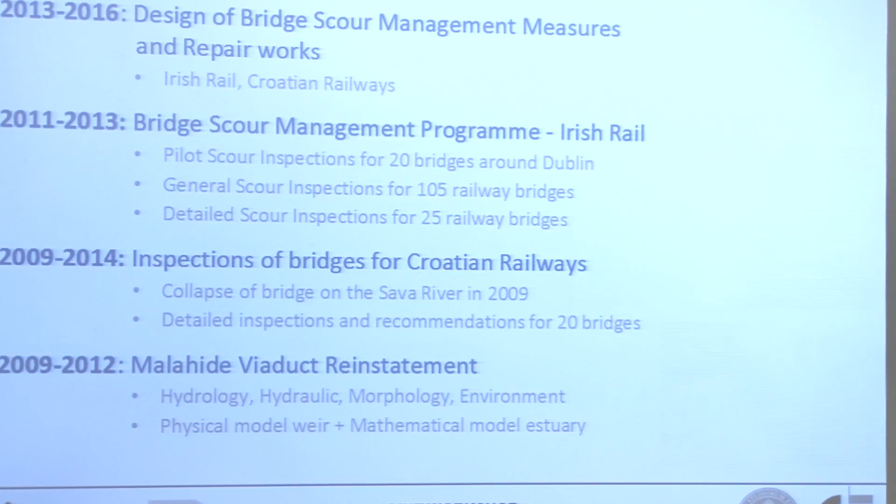I would start a little bit with the background on how the project idea evolved.

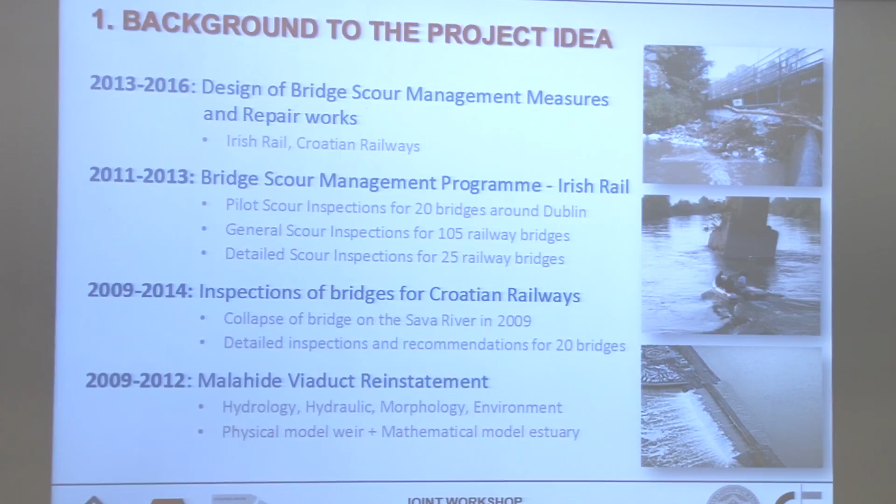We, as partners, were actively involved in the rehabilitation of Malahide Viaduct, which collapsed in 2009. We did the analysis of past events, and we were also involved in the investigation and design of that weir. We were also involved in the assessment of the causes of the failure of the Sava Bridge, which I was not able to join you on yesterday, but we were actively involved in that project as well.

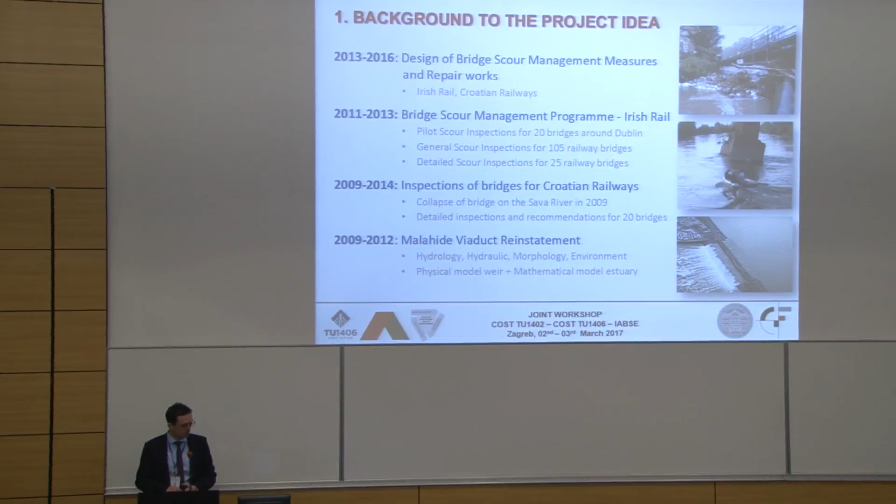Further to that, we were involved in the assessment of scour risk across Ireland for more than 100 bridges, and also in design studies of scour protection in Croatia and Ireland, etc.

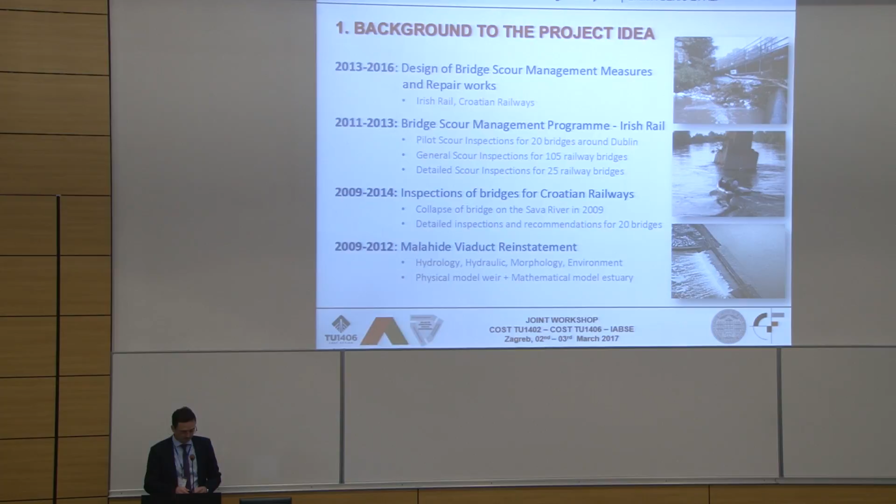This is what my previous presenter also pointed out, that scour is a main cause of failure of bridges. From this well-known study in 2007, if we look at the number of bridges and causes of bridge failure, we can see that 58% of the failure is due to hydraulic effects, which is actually scour.

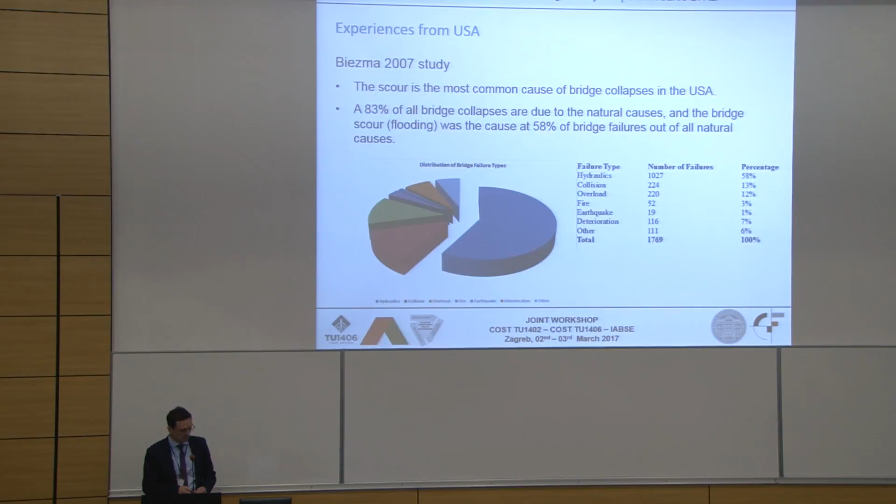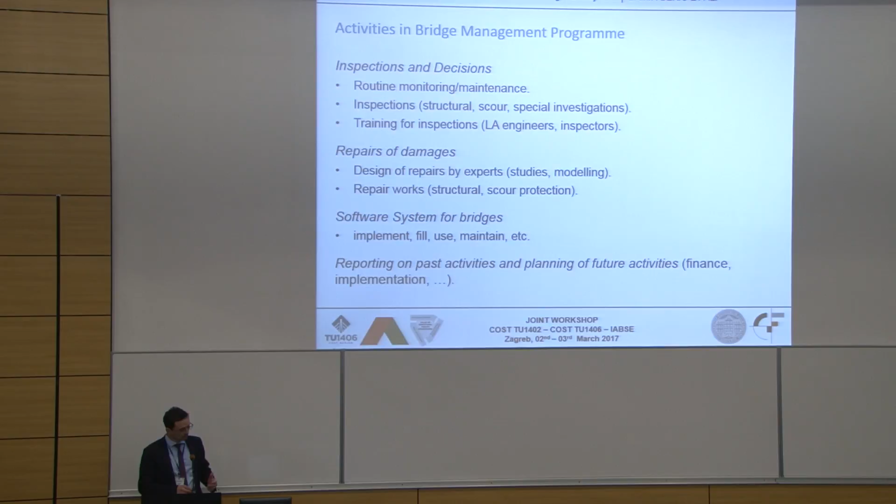There's also reporting of past activities and assessment, and looking at future activities. So from the end user point of view, there are always limited budgets and limited time available to collect and process all this data.

So decisions must be made in terms of how and where those limited resources should be invested, and where the investment is not justified on the other hand.

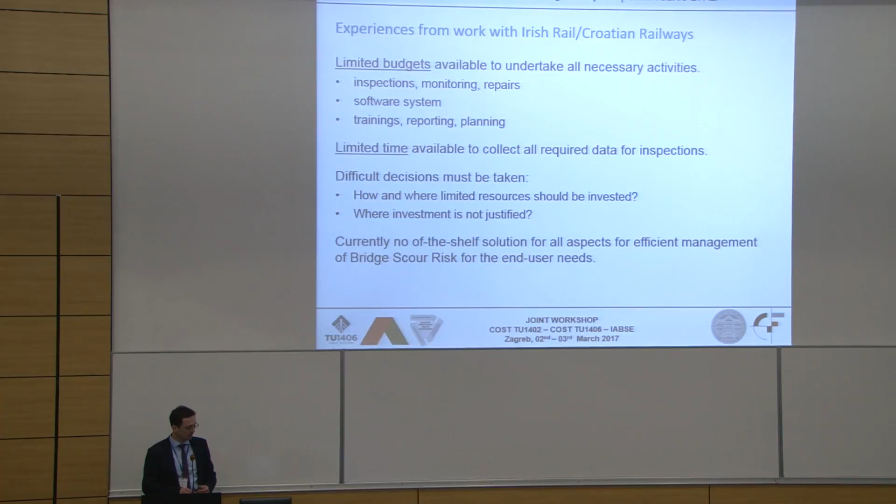So when we looked at this, we actually looked at the various possibilities out there on the market, but we said, okay, we need to look at this from scratch, from the beginning. This is how the idea ended up with having a cost-effective solution mainly for scour risk, which is what I will point out today, but we broadened it up also to the structural aspect of bridge safety.

So in general, BRIDGE SMS project is an IAPP project under the FP7 IAPP program. Its duration is 4 years, from 2015 to 2018.

The budget is 1.4 million euros. The partners are two research institutions, University College Cork and the Faculty of Civil Engineering from Zagreb, two industry partners, Cork County Council from Ireland and Infrastructure Portugal, and a software company from Zagreb, Atlas.

We also have a supporting institution, University of Lincoln, and two institutions from Ireland.

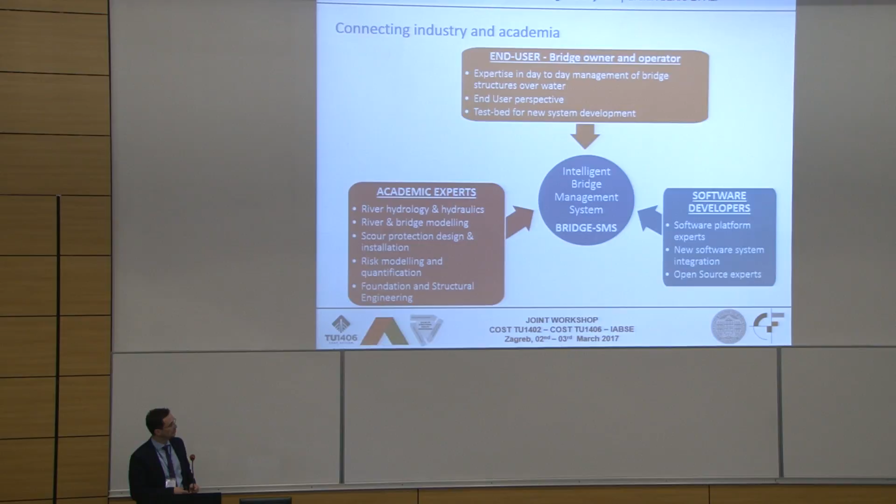So when we look at the scheme of how this interconnects, from the entire project we have the end user perspective. We get information from their needs, what their daily work actually is, and how they look at this inspection system, because they're not dealing only with bridges, they deal with roads and other aspects of infrastructure assets. Then we have academic expertise from universities, and software developers who help develop the entire system. All of this is jointly interconnected within the entire project.

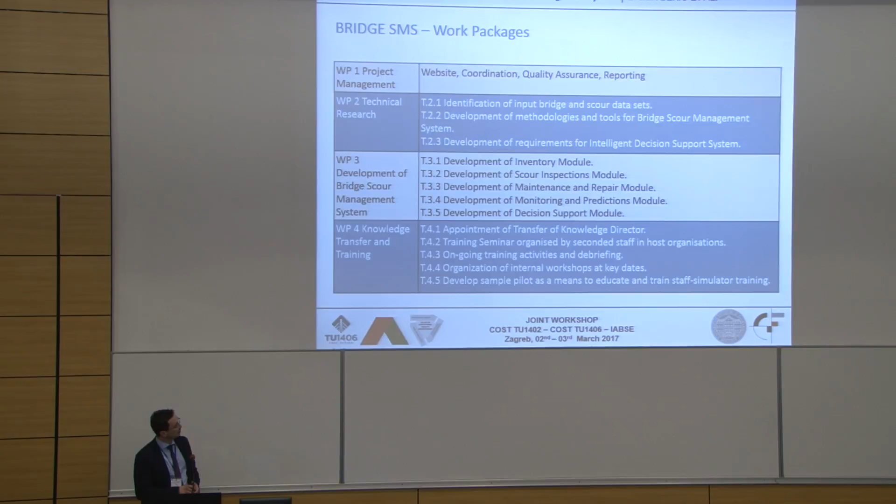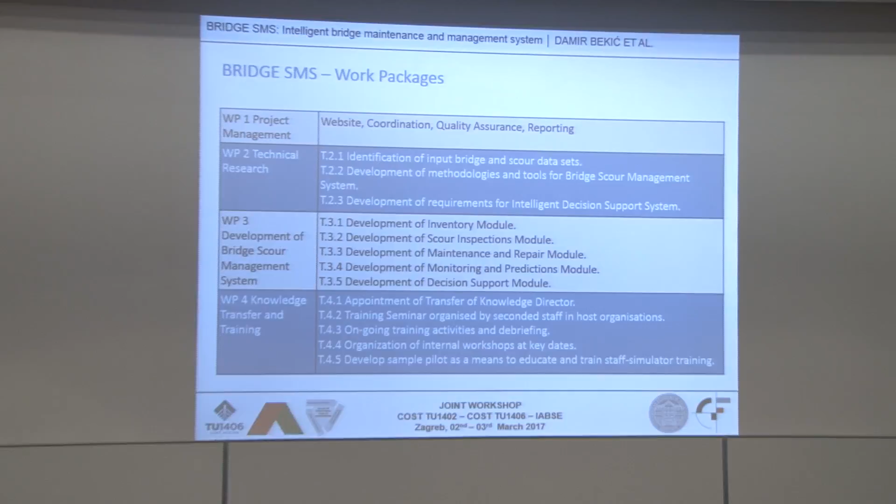If we just quickly look at the work packages, the first is more general project management. What I would like to point out today are a few elements of the technical research, which actually goes into the identification of input bridge and scour data sets.

The data is the most valuable thing we've seen, and how we process, collect, store, and use the data is, I would say, one of the big elements of our idea and of this project.

If we look at work package 3, it's the development of different modules, so we are looking to develop it as a modular system. In the end, there is knowledge transfer and training involved in this project, as this is part of the Marie Curie Action.

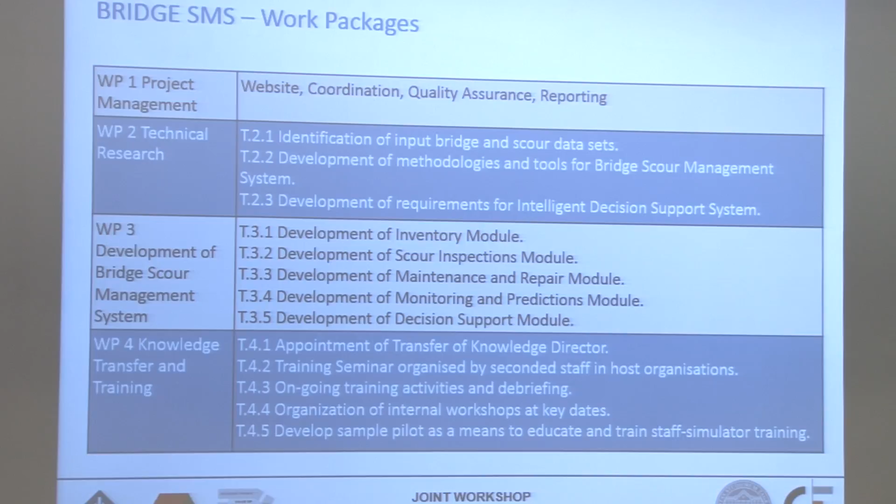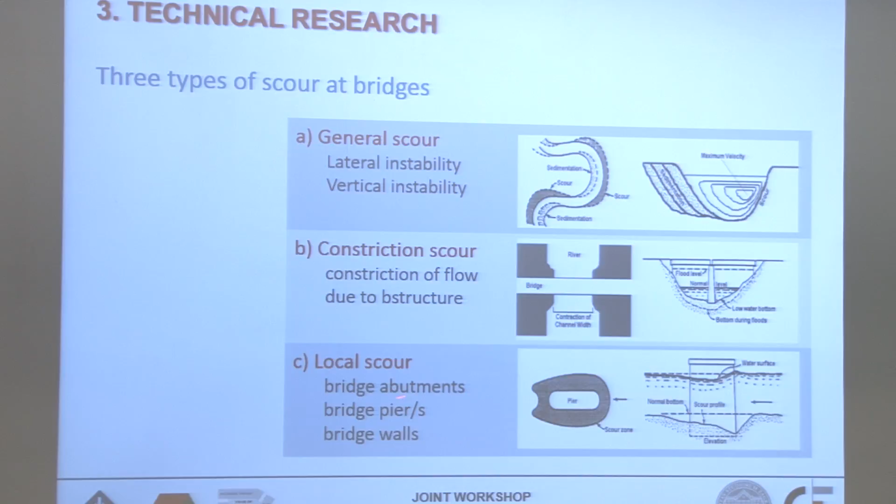When looking at the general aspect of scour, there are actually 3 aspects which need to be addressed. The first is general scour, a morphological development of the river where there is no structure at all, so the river develops either horizontally or vertically. Then we have a constriction scour aspect where there is a bridge included, which constricts the flow, increases velocities and produces problems to the bridge. And there is local scour due to abutments or piers, which deflects the flow and increases the potential of scour.

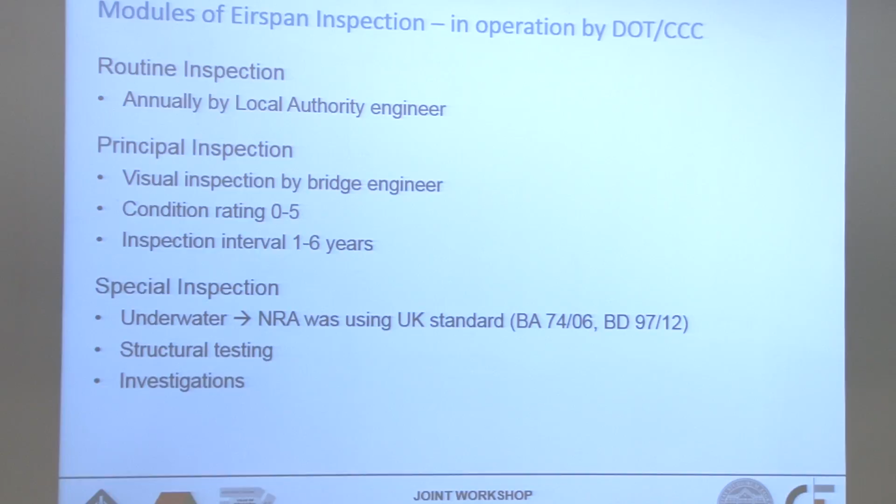Now looking at the end user, which is our county council in Ireland, they are using the Eirspan system, which is basically from Denmark. We have a routine inspection, done annually. Then there's a principal inspection, done either once a year or every 6 years. It gives a condition rating, usually by visual inspection of a bridge engineer. This principal inspection actually has only one component for scour, which is the condition of the riverbed.

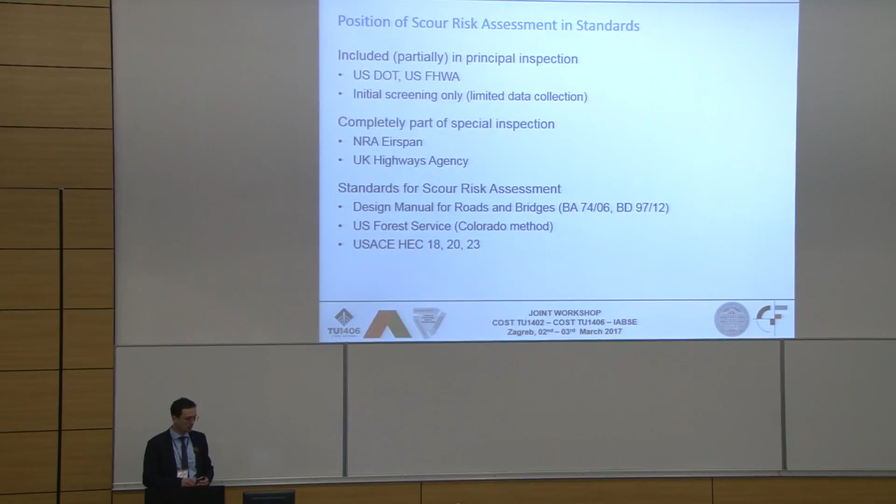So if we look at general scour, constriction and local scour, there is only one component that looks at all these 3 aspects. Where is this scour risk addressed? The National Road Authority in Ireland uses UK standards, BA 74/06 or now BD standard, to assess scour risk. So in the principal inspection, only one component looks at scour risk in this existing system. When we looked at other systems, for instance from the US Department of Transport, scour risk is included in the principal inspection, but only partially, not fully covering general, constriction and local scour. Sometimes the NRA system uses a completely special inspection to investigate scour risk.

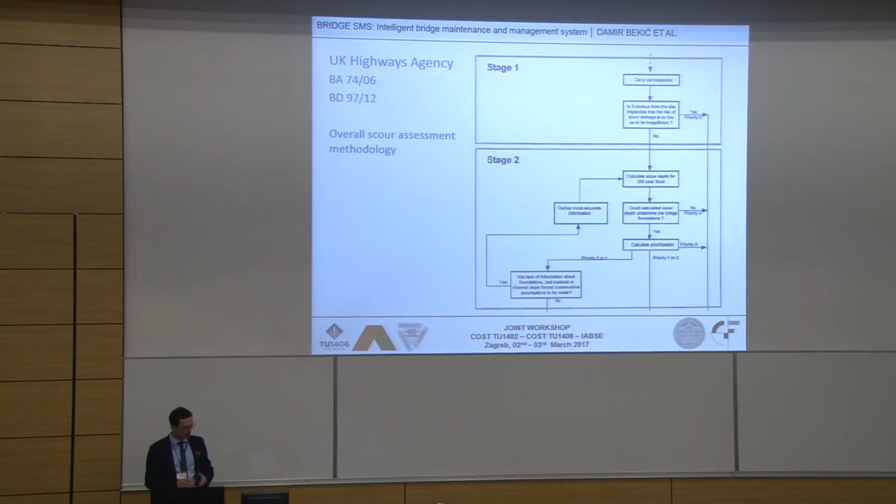So to assess scour risk, there are different standards to include in the entire bridge management system, either the UK or US standards, and I would like to show you some results of using those. My presentation is mainly focused here on scour risk, not the whole aspect, because there is limited time to present everything.

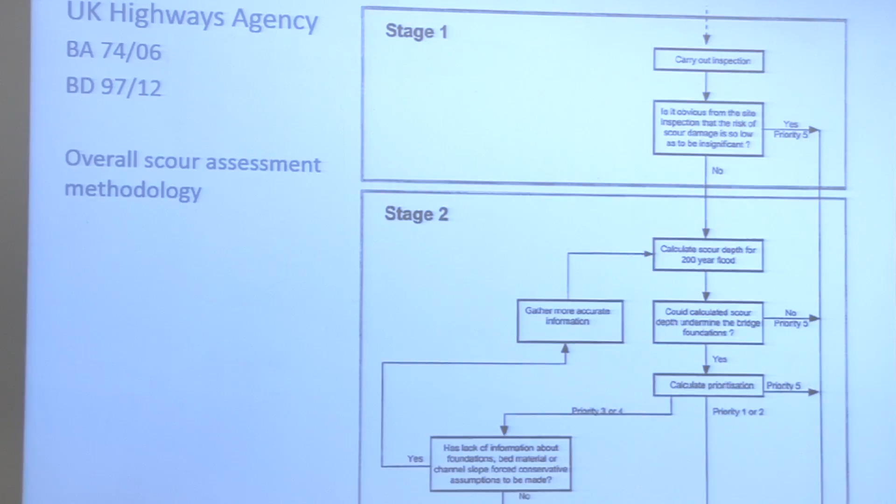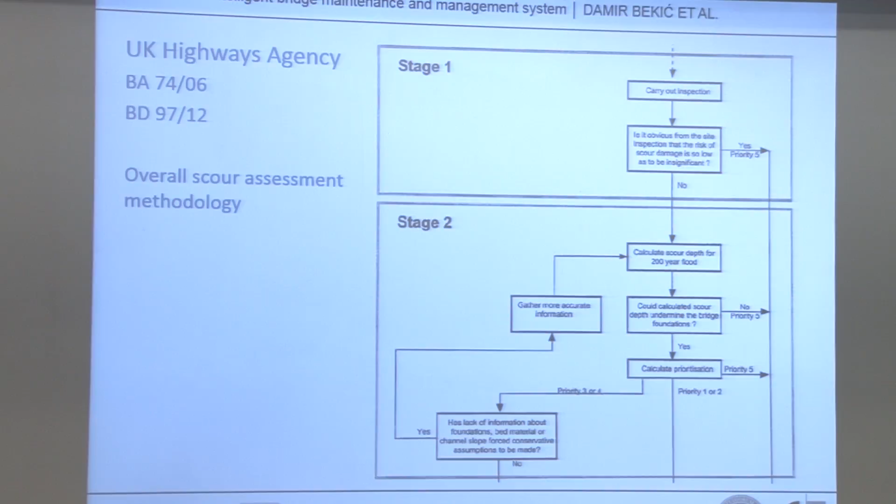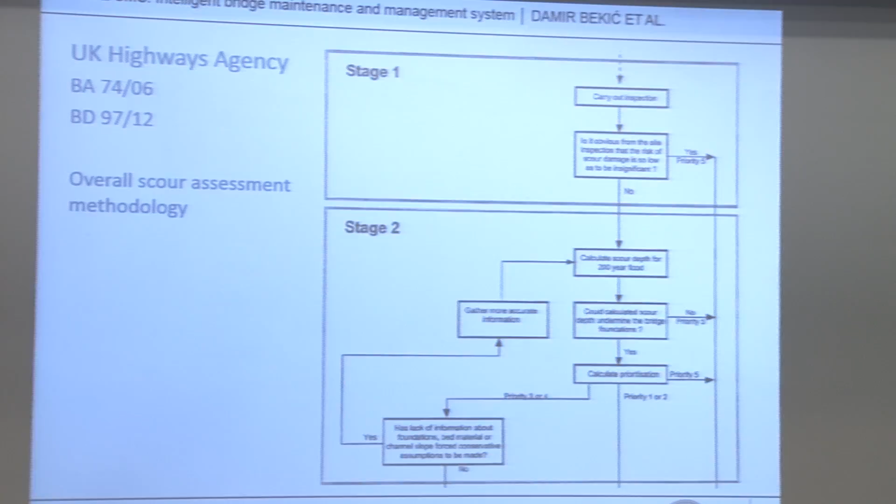If we look at the BA 74/06 standard, there are 2 stages for assessing scour risk. The first stage gives just one simple answer: is it obvious from the site inspection that the risk of scour damage is so low that it can be neglected? If yes, then we have a condition rating or priority rating of 5, and the inspection is over. This is a very simplified approach to the 3 aspects of general, constriction and local scour. If it's not negligible, then you go to stage 2.

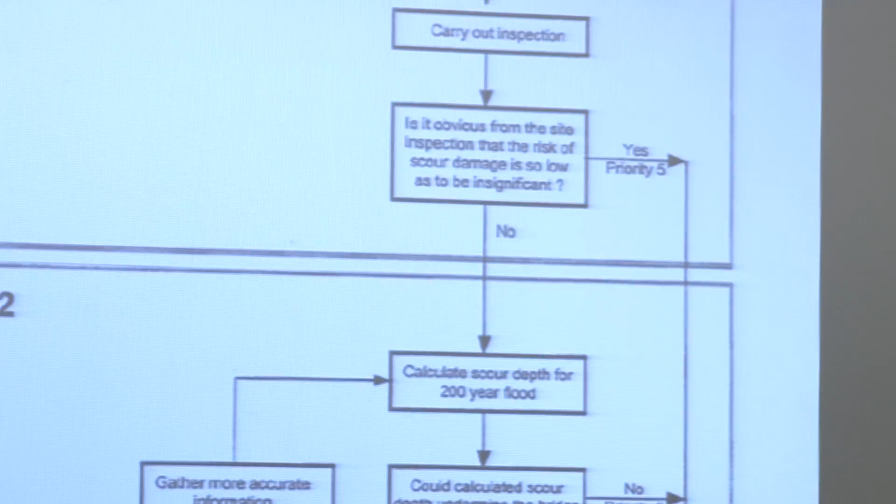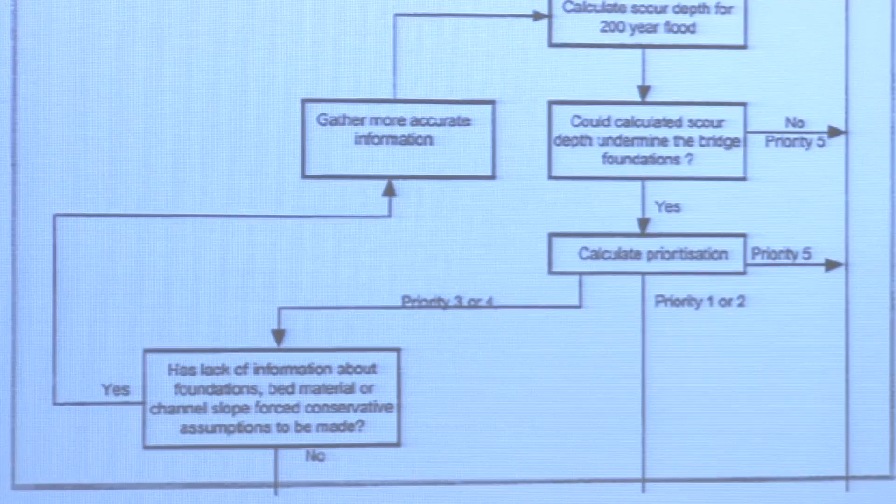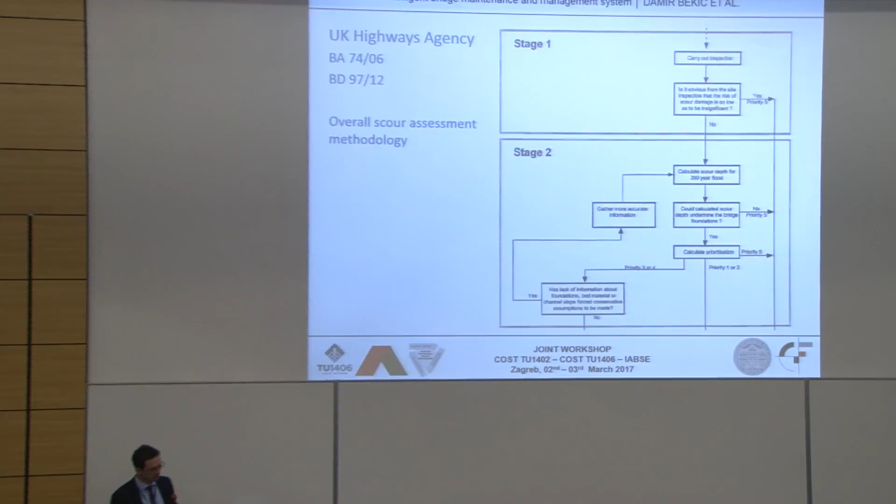In stage 2, you need to calculate the 200-year flood, then you need information on the foundation depth, and then compare your expected scour depth with your foundation depth. If your calculation is correct, then you prioritize your bridges, usually to a rating of 5. But if you don't have information on foundation depth, then you need to go back and actually investigate the foundation depth.

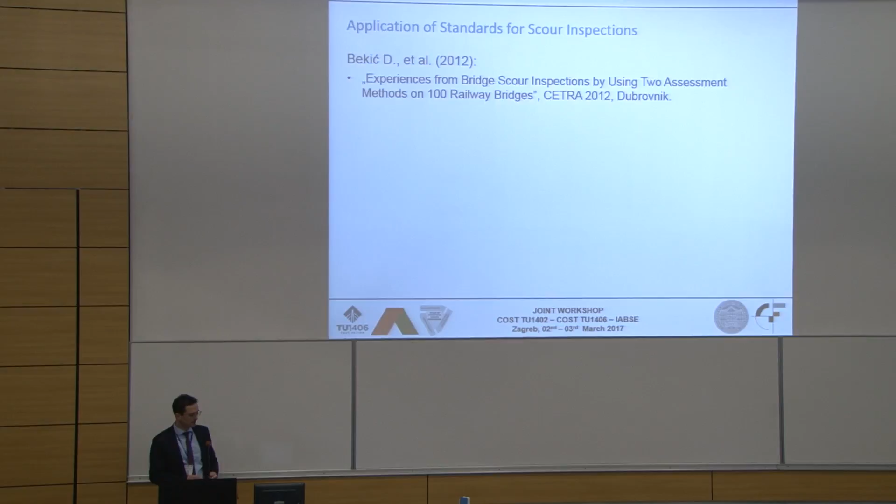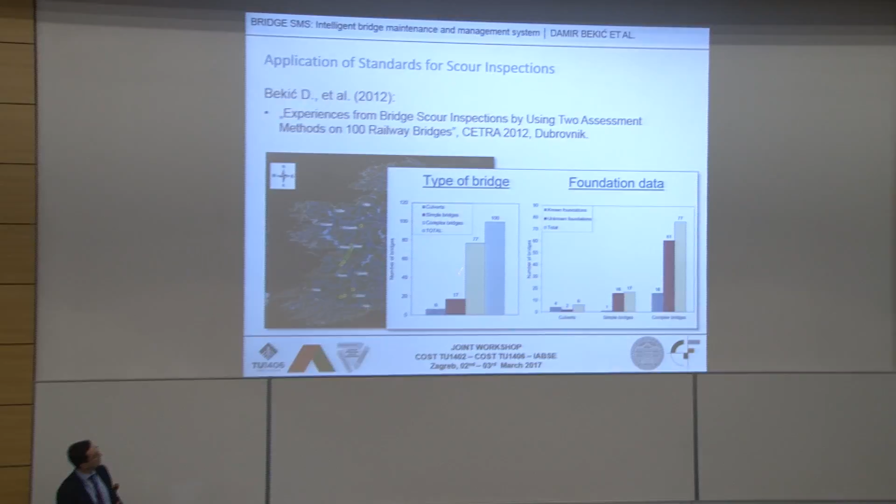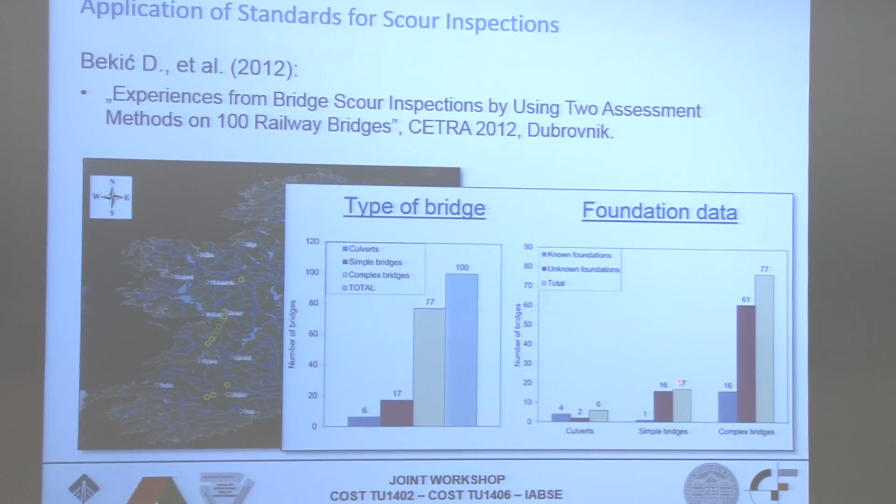From past work, out of these inspections from Ireland, we've seen that from 100 bridges across Ireland we looked at different types: culverts, simple bridges and complex bridges. Looking only at information on foundation data, for simple bridges there are 16 bridges with unknown foundations out of 17, and there are 61 unknown foundation bridges out of 77. So there's a large percentage of bridges without information on foundations.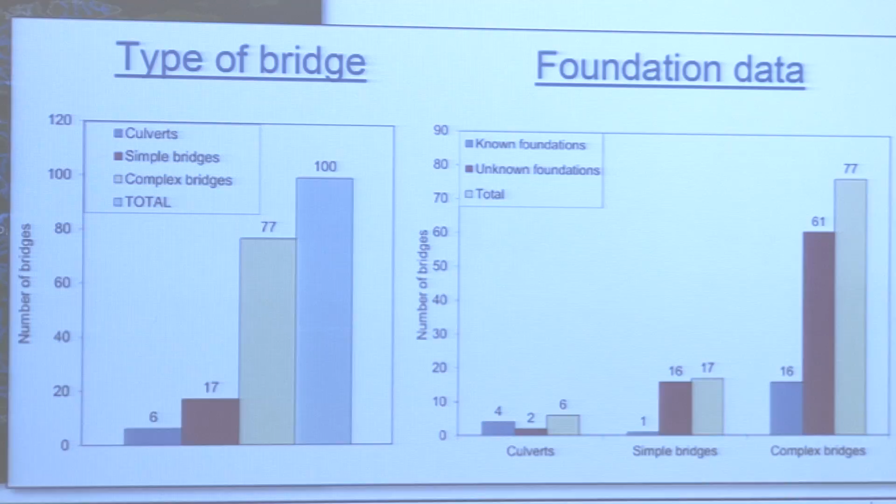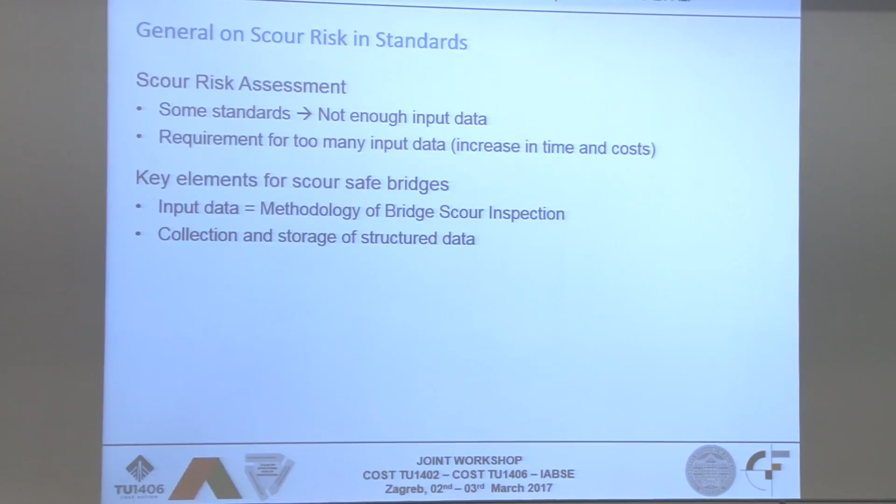So the question is: how do you then assess the scour risk with certain standards that require that information? We've seen that some standards give not enough input data to assess the three aspects of scour risk, while others require too many input data. Input data is the key aspect of bridge scour inspection, and what information you require and how you gain that information is one of the key aspects of this project.

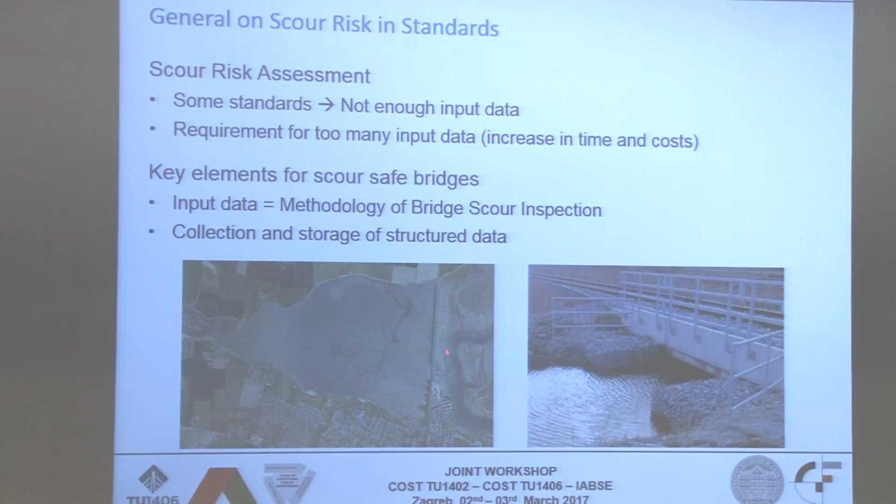We also looked at different types of structures. For instance, this is Malahide viaduct, which shows one key aspect of scour risk here is constriction scour. The width of the upstream estuary of the bridge is 3 kilometers, which decreases to 174 meters, giving significant constriction. That is the reason for the increased velocities at Malahide viaduct.

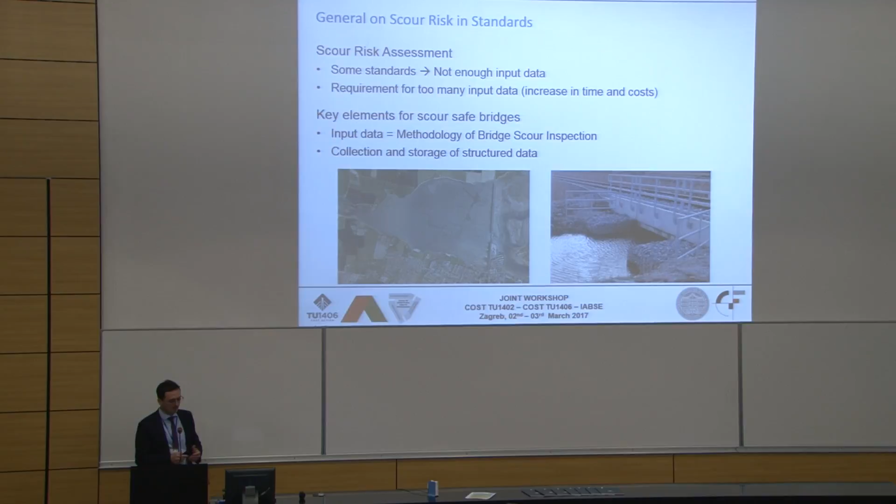For this complex system, to have the same input data and all the elements compared to a simple new structure like a culvert, it doesn't seem to be cost effective. So we've seen how different input data is needed for different structures as well.

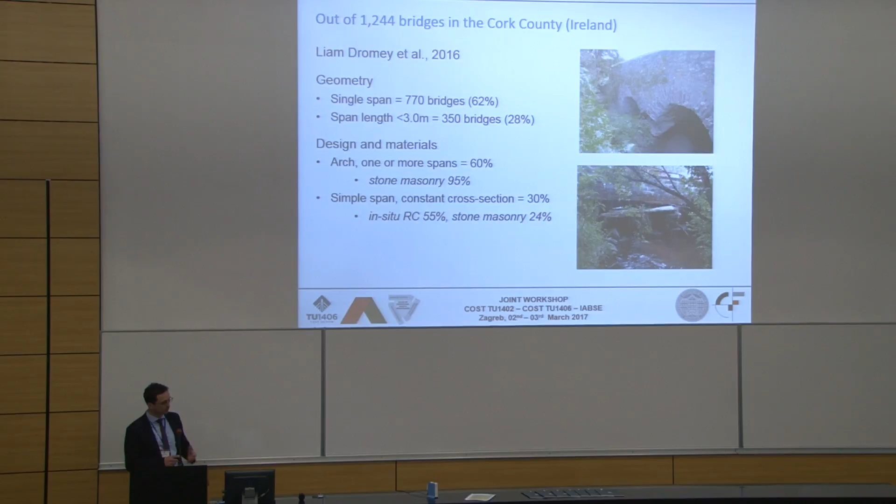We're looking at this from the end user point of view, and our pilot case is located in Cork County, Ireland. Cork County is the largest county in Ireland, and looking at the bridges there, out of 1,200 bridges in Cork County, single-span bridges make up about 62% in Cork County, with spans less than 3 meters accounting for 28% of those.

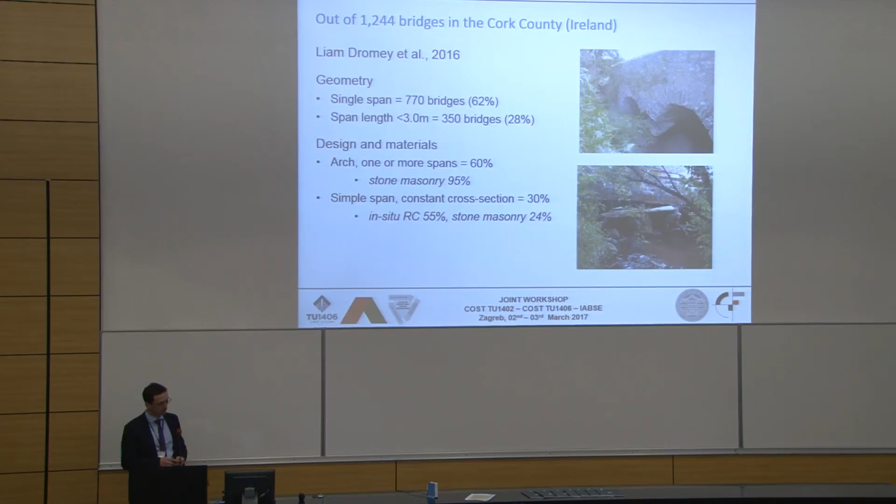So we're looking at a large number of bridges with simple geometry and spans less than 3 meters. In terms of structure, the main material is stone masonry—95% of those bridges are masonry. Having that information from an end user point of view and past experience, we started developing the first draft of guidelines for both structural and scour inspection of bridges.

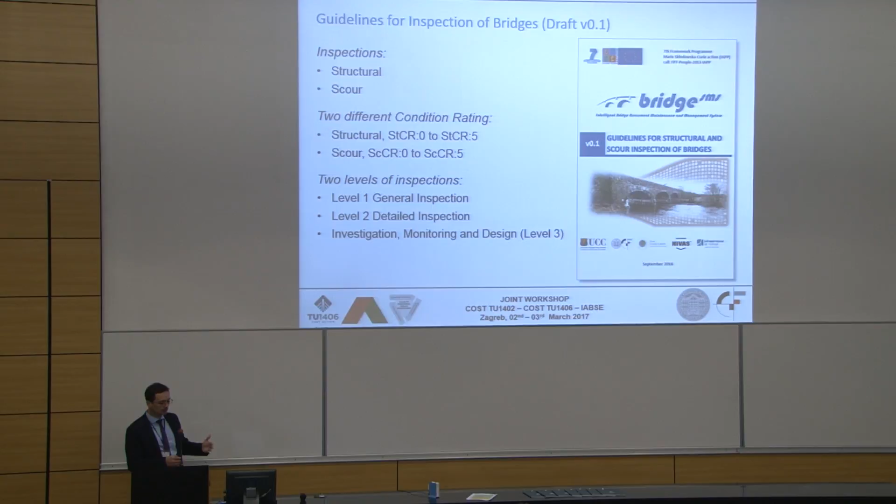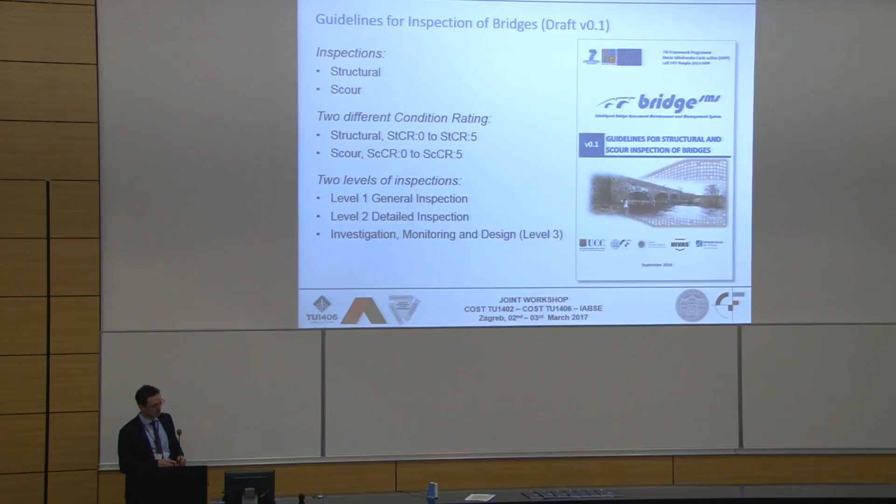We looked at two aspects, and developed those structural and scour aspects into three levels. Level 1 is the inspection of simple bridges. Level 2 is for complex bridges with complex geometries and complex flow conditions. Level 3 covers special investigations for certain bridges.

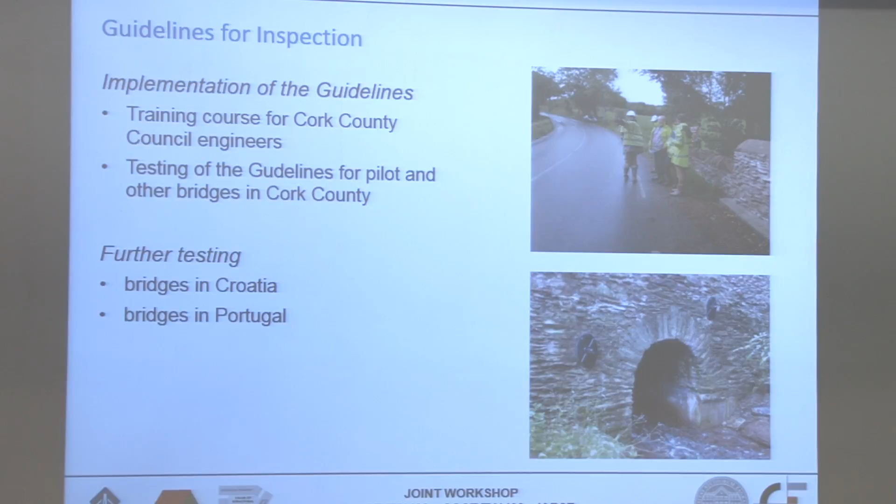We started to implement those guidelines. We had training for the end user, and we will try to test it not only on bridges in Ireland, but also in Croatia and in Portugal.

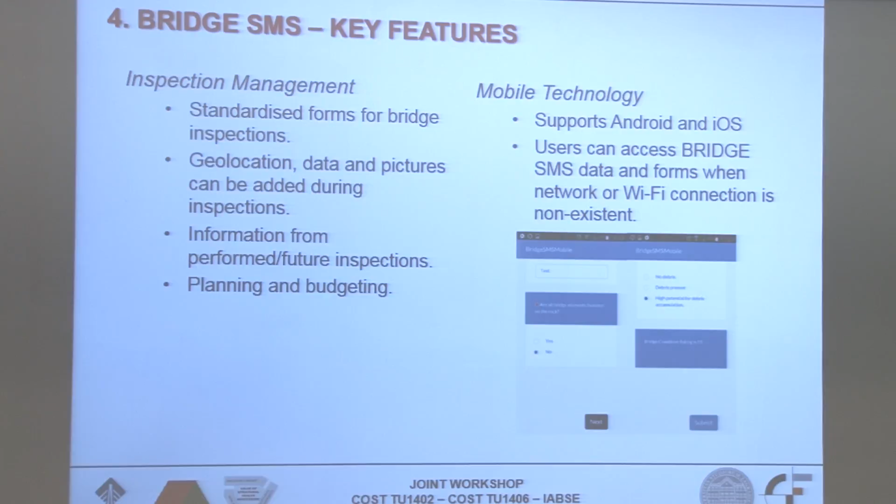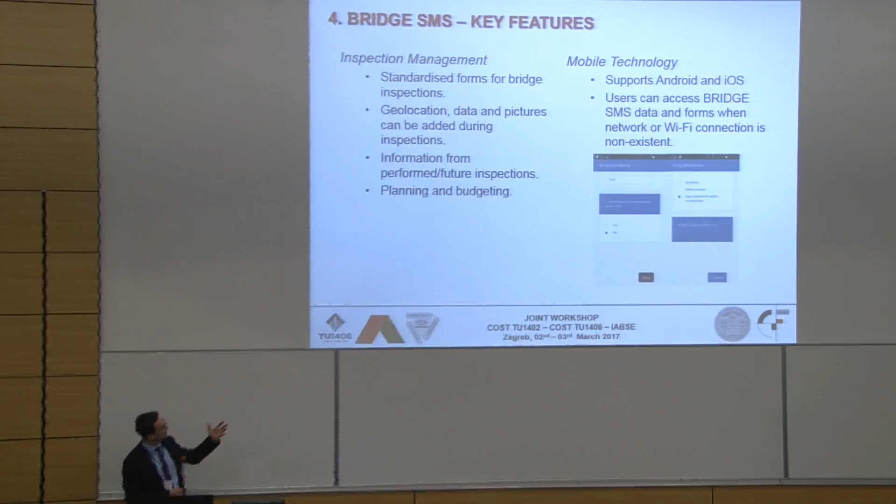But it's not only inspection that we're looking at in this project for bridges—as I said, we're looking at a wider aspect. And as this action and workshop is on the value of information, I'd like to show you some features here that relate to the information side.

As I said, it will be a modular system, and our inspection management will be one of the modules. All the data will be gathered in a structured way and stored in a database. From the end user point of view, we're developing a mobile platform to immediately inspect the bridge on site and upload it via tablet directly to the website. For complex bridges, there will also be requirements for a desktop study.

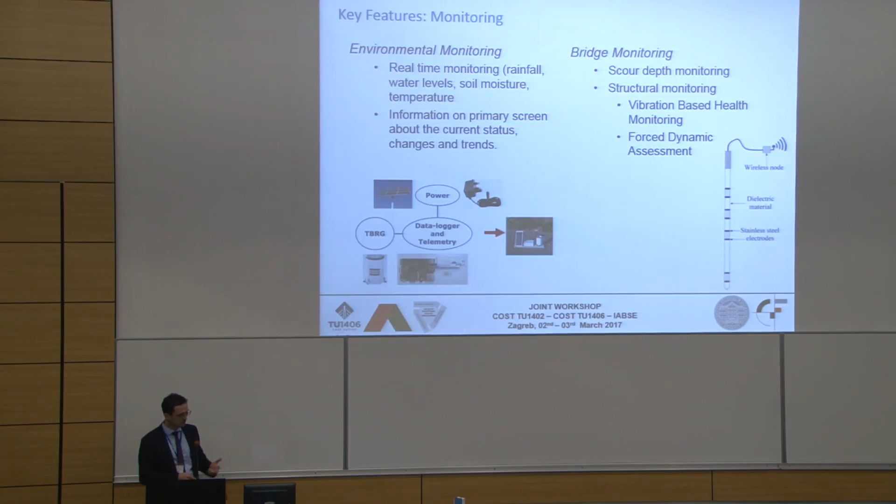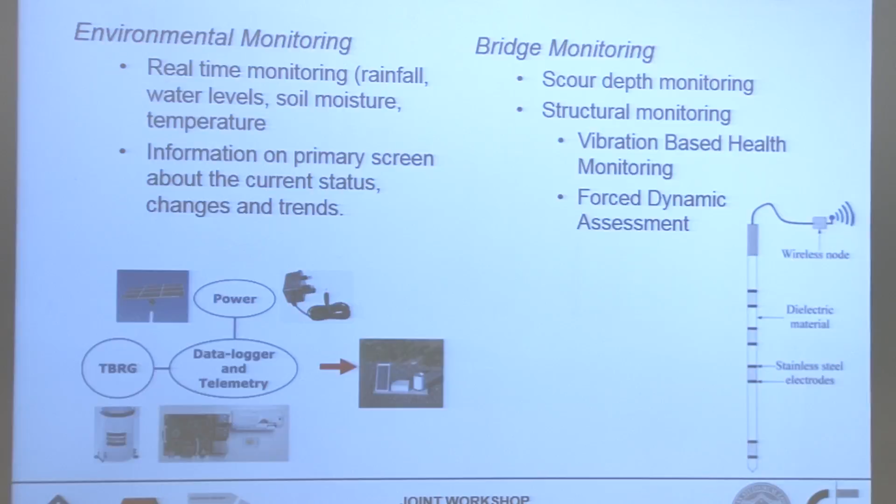Some other aspects are environmental and bridge monitoring. We're developing a new system that will be cost-effective for monitoring rainfall, temperature, and humidity of the catchment, to predict floods. We will also look at monitoring of the structure and scour at the bridges, again looking at cost-effective solutions. In terms of flood management, we've now partnered with EFAS, the European Flood Awareness System.

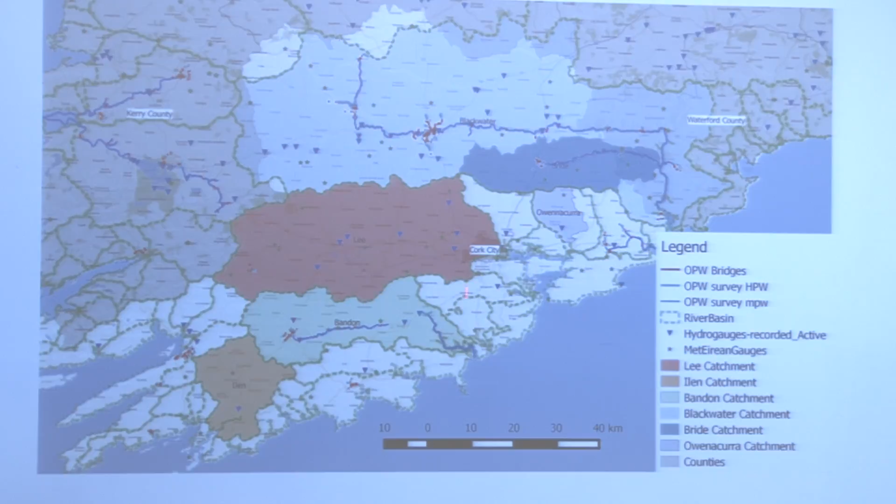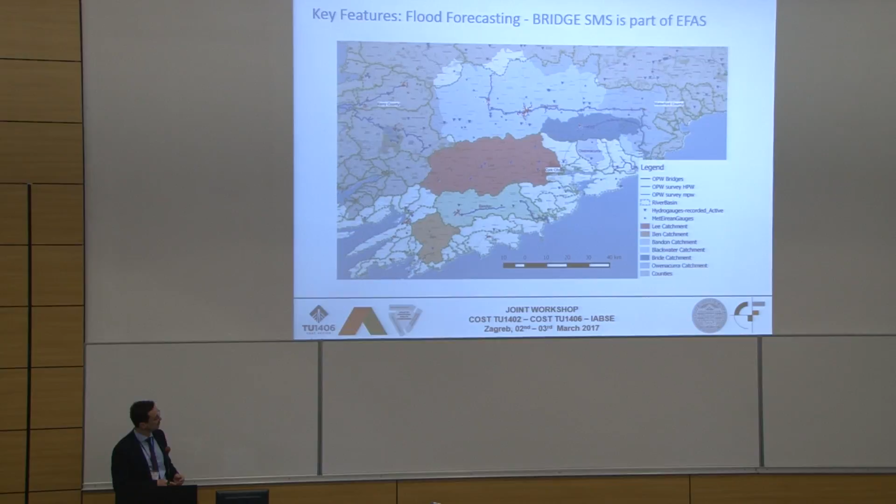This will help us predict flood conditions at our pilot bridges. And I'd like to, at the end, show you our pilot catchment—this is the Bandon River and Bandon catchment. So far we've identified 6 pilot bridges, but we're looking to include even more towards the end of the project.

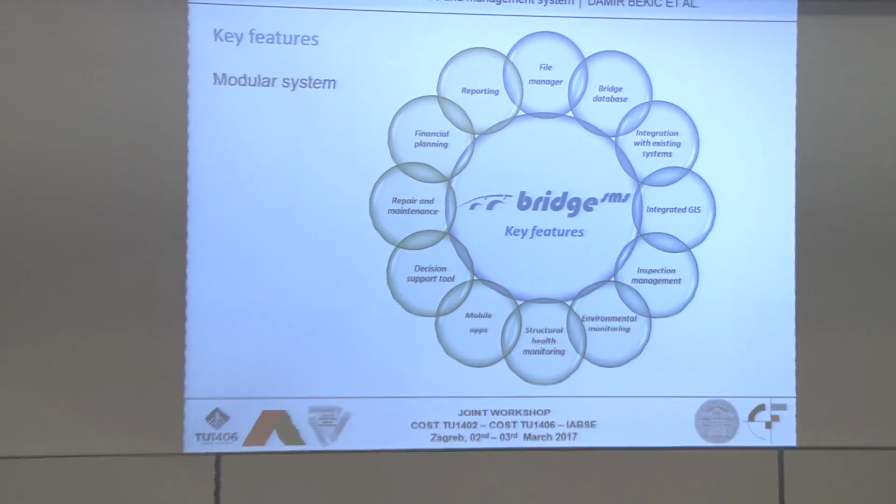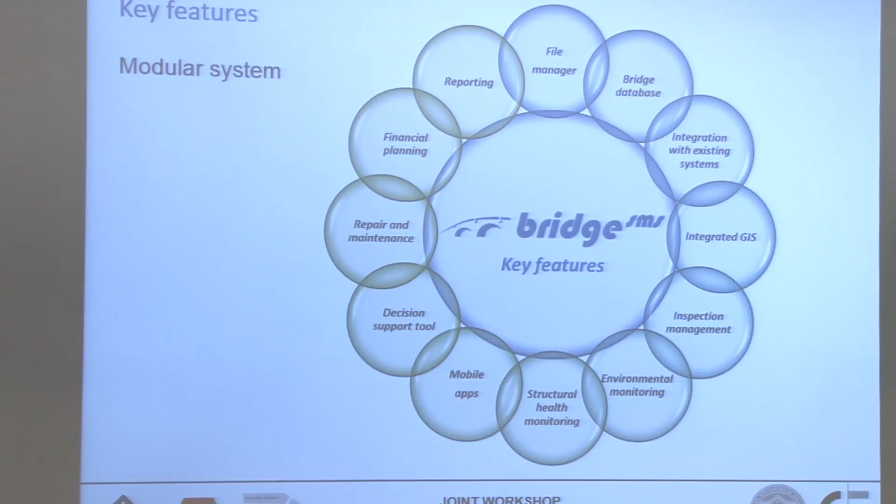This is the overall view of the BRIDGE SMS system. I won't read through all of it, but as you can see, it's a modular system—for certain bridges we can use all the modules, but for simple bridges and simple cases we can simplify those. We will have an integrated GIS system, a decision support system, and all aspects required, including financial planning of future works.

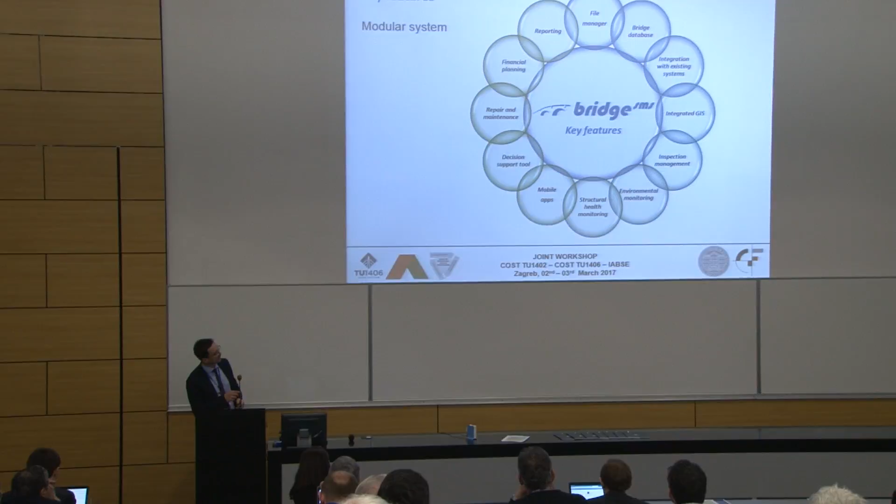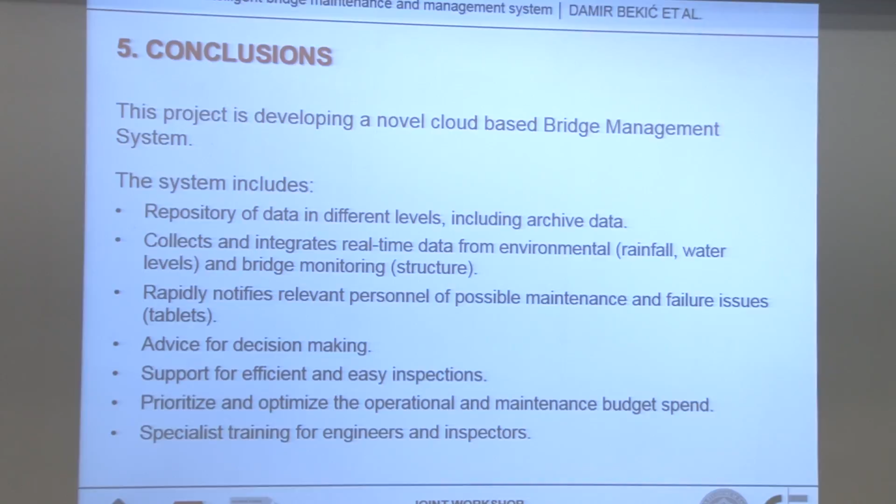To conclude this presentation, we're looking at various aspects of bridge inspection from beginning to end, trying to make it as cost-effective a solution as possible. We're looking at how to store data, how data is collected and processed in real time, and how to use that data to rapidly notify personnel if certain elements become critical, especially in terms of flood predictions.

We will also have decision-making tools from the end-user point of view, to support efficient and easy inspection—this is one of the key elements of the project. This will help prioritize operation and maintenance budgets for future works for the end user, which is also included in the project.

This also includes training of engineers and inspectors, because we've seen that scour risk is not deeply known among end users—the managers of the bridges—and how their knowledge of scour risk has developed in the past.

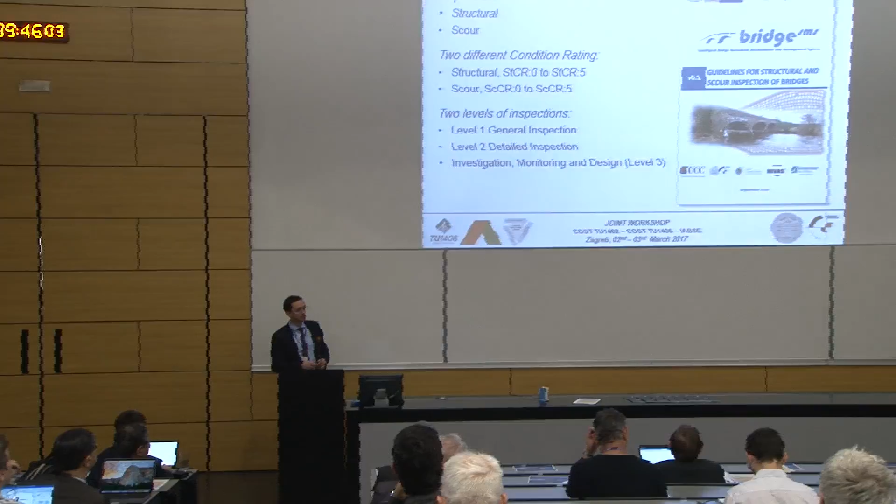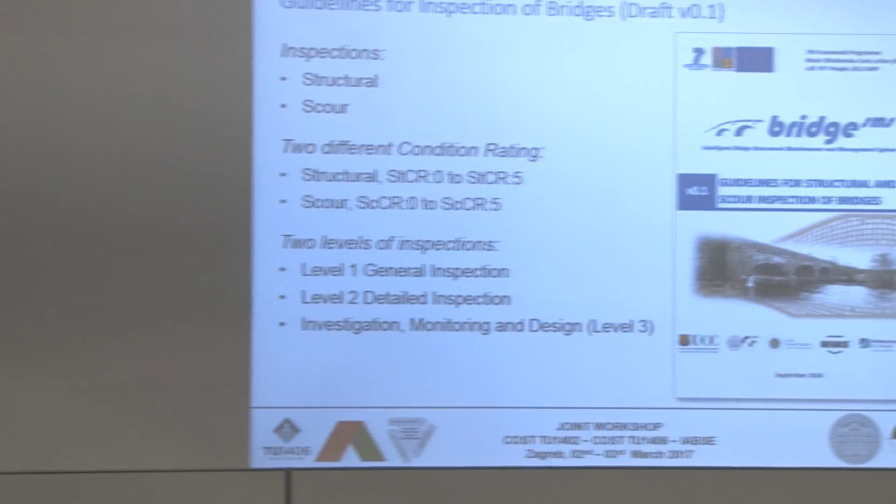If I can have just one more minute on that. This level 1 general inspection, the idea is actually, and what we've seen in the Cork County Council, they outsource completely their inspections. It's done by consultancy companies. It's not the same situation with Infrastructure Portugal. They're doing that everything internally by themselves.

So then we asked the Cork County Council, would you be in favor of having inspections done by your own engineers? Because that will keep the knowledge inside the company and they will be able to assess by themselves, and they were in favor of that, especially for simple bridges. So that's why we split the bridges between level 1 and level 2 inspections, and we are giving them a tool to inspect all level 1 bridges, which is mainly simple bridges with a single span. So this is the basic. Of course, it can be outsourced as well, level 1 inspection, but this is also our idea.

Okay, thank you very much. We can continue the discussion later. Thank you. Any more questions from the audience? Okay.

I think scour is a very interesting problem, and I would only like to challenge you, Damir, to give support at working group 3 in the task coordinated by Nico, because I think it's interesting to have more discussion about this issue. What indicators should we consider for scour? What is being studied in this sense? What can be, in my opinion, differentiated from the general to detailed inspection?